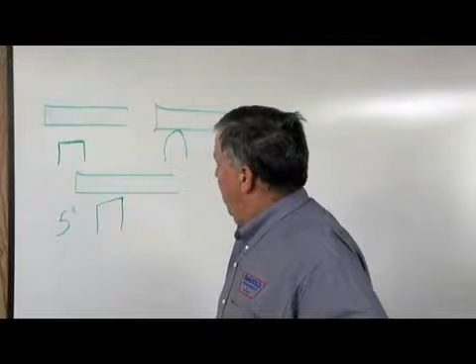Well, the design of the check assembly has to do with that area in relationship to how much spring load it takes to do it. The Cla-Val design, what they wanted to do was come up with a very, very small point right here. And that small point, as I say, is generated by that 5-degree taper of that seat. This is exaggerated. A 5-degree taper would kind of be just like that. It's almost imperceptible, actually. But anyway, the reason they have that 5-degree taper is because it had to do with the flatness of that disc.

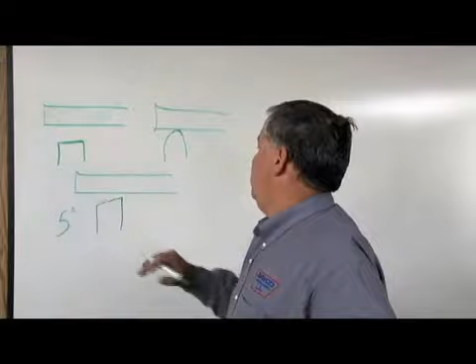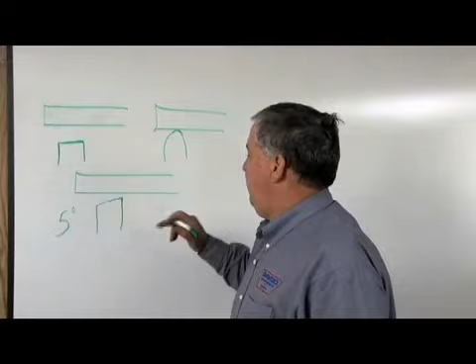Remember, it's a hinge or pivot style check. And like we talked about, the hinge or pivot style check has to have a perfect, where the disc hits the center of the seat, kind of like a golf swing. If it doesn't, it's off center, you have troubles with your differential loading. Well, Cla-Val has a relatively lower loading on the check valve. So by having this 5-degree taper, it was critical that this disc is perfectly flat as it first hits that seat right on the tip.

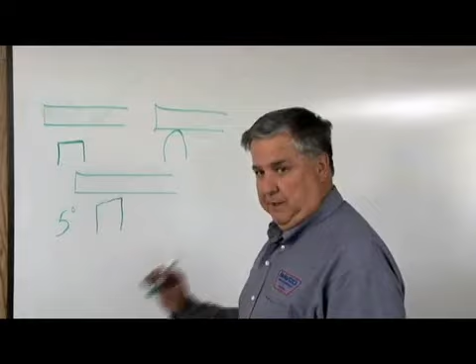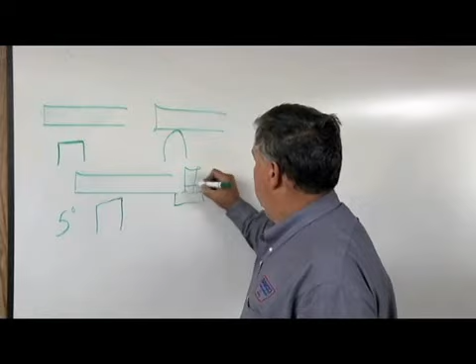And to hit that perfectly, it has to be within 5/1000ths of an inch. And that's why we have those spacer washers that we talk about to put the adjustments back in with 5/1000ths. Because what happens is, you know, it's got that bolt in the center here, and if we don't have the right amount of spacer washers when you punch that in, what happens is it bulges that disc out of the disc holder like this, right? And it bulges that disc.

So instead of this sitting right on the point, now you can see that that sealing surface is like this. So instead of sitting on one little point, now we're sitting on a relatively wider seat, and it's going to affect the way that our check loading holds. So that's why it's critical that we have that disc perfectly flat. We can't have a bulge into it, because if we have a bulge, we eliminate the advantage of the 5-degree taper by making it a rounded disc instead of a flat disc.

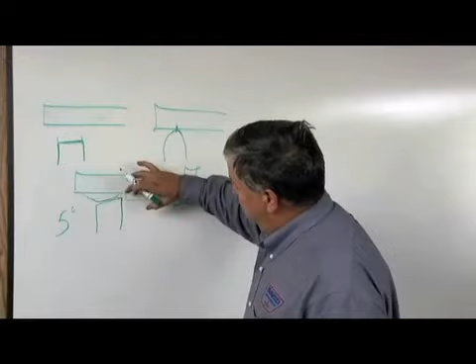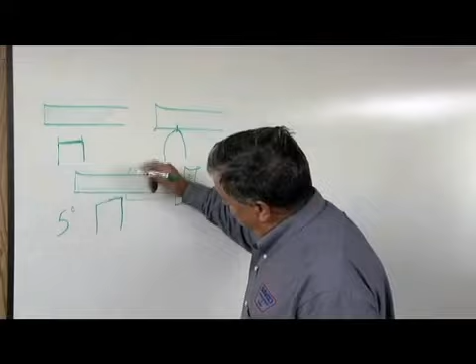Well, what happens if it's too thin? Again, if it's too thin, let's say the disc is up here instead of down, similar problem happens, because remember, this is a hinge or pivot style check. So if it goes to this point and doesn't hit that disc, it has to keep going a little bit farther, that much more distance. And as it goes down, now suddenly it's cocked. So that's why it's critical on the Cla-Val that it has to be literally within 5/1000ths of an inch, the flatness of that disc.

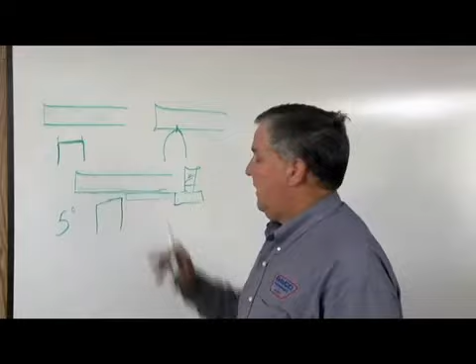If there's any kind of bulge like that, it negates the 5-degree taper. If it's too low inside here, same story. It's going to negate the 5-degree taper. So this is the 5-degree taper on the Cla-Val seat, and why it's so important to have that disc perfectly flat within 5/1000ths of an inch.

So to make sure the height of this disc with this disc holder on it is right, because you can see that if it was too thick and I pushed down with this bolt on top of here, it would squeeze that rubber out of the disc holder, and I would lose the advantage of that 5-degree taper. So how do I make sure I take up the tolerances between this plate and this plate? And that's basically what I'm trying to do with these 3 spacer washers.

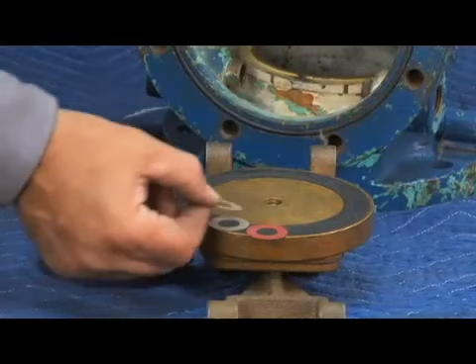These spacer washers, the gray ones are 5/1000ths of an inch thick, and the red ones are 15/1000ths of an inch thick. So with 3 of these, I can make up between 5 and 25/1000ths. In other words, there's 5. I put 2 together, there's 10. I take 1 red, it's 15. A red and a gray is 20. A red and 2 grays is 25/1000ths of an inch. So that's how I'm going to make up that 25/1000ths of an inch tolerance on this disc in relationship to this disc holder and disc retainer.

So how do I size that? Every time you rebuild these, you have to size these spacer washers. I've heard people say, oh yeah, you take them apart, you put the same color back as you took out. That's not true.

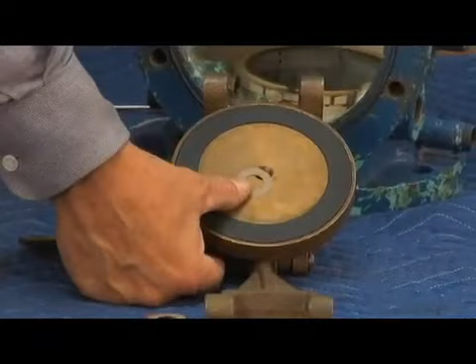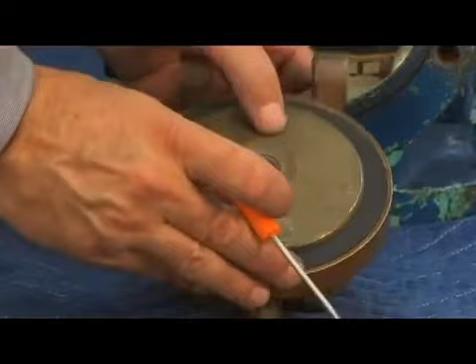Every time you take the disc out of the disc holder, you have to resize it, because that 25/1000ths is that close of a tolerance. So you start with the smallest, which is 5/1000ths, and you place it so that it's sitting across the bolt hole, just like that, okay? Covering up the bolt hole, I'm going to go ahead and put my disc holder on top and just hold it with my finger. And as I hold it with my finger, you can see where it's sticking right there in the middle of the bolt hole.

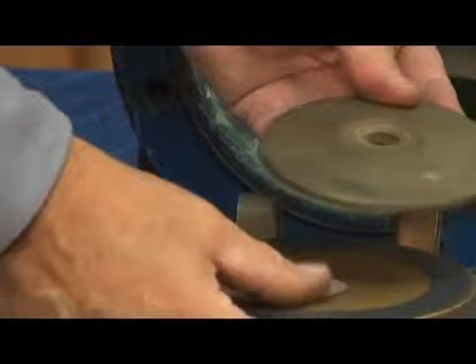So what I want to do now is see if it moves. It moved very easily, didn't it? So that means the tolerance between these two is more than 5/1000ths. So now I get 2 of them and go to 10/1000ths. Same story. Place it over the bolt hole. Place my disc retainer over there just like this. And it moves very easily again. So I haven't taken up the tolerances.

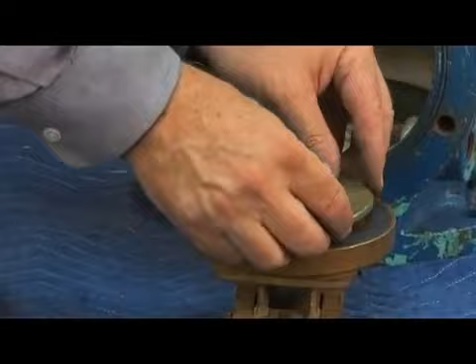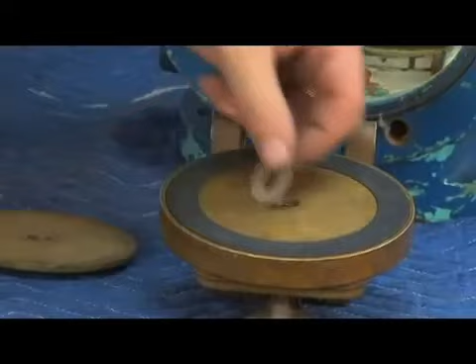Now I go to 15. With that across the bolt hole, now suddenly it doesn't move. In other words, just with the light pressure of my thumb, it's 15 thousandths. So that tells me that the tolerance between here is between 10 and 15. 10 is too little, 15 is too much. So we go down to 10. You go to the smaller of the two numbers. Because remember, we're going to tighten this bolt on there, and that's going to take up the tolerances between that 5 thousandths. So putting my O-ring back on, now I have it so this disc stays perfectly flat.

But it could be anywhere from 5 to 25 thousandths that you have to make up on that particular check design. The only one that's different is the 10-inch. The 10-inch disc retainer has a ring like this with 16 screws going around it like this. There is a washer on the back side of each screw that is one size. You don't have to size each one, but you do have to place that spacer washer on the back side of the 10-inch, which is slightly different.

But most of them, 2-inch through 8-inch, are going to be a single bolt like this with an O-ring under the bolt. Don't forget the O-ring under the bolt. Size your spacer washers accordingly, and putting it back together, making that perfectly flat will make your repair job a lot easier. Now, that's a 308-1, as I said. 308-4, Chevron disc. 308-1 new style is this style of disc. It's just a little bit wider.

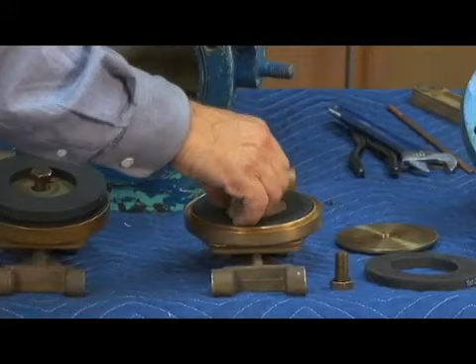What's different on the 308-4, and that's the one you see here on the right, as I mentioned, the difference in the 308-4 had to do with the disc and the disc retainer. If you'll notice, when I unscrew the bolt off the 308-4, we have that same O-ring. Disc retainer, we have our spacer washers. What did this one take? This one has 20 thousandths, but the disc is separate. Also notice that the disc holder is different. Notice that they put this area around the seat right here.

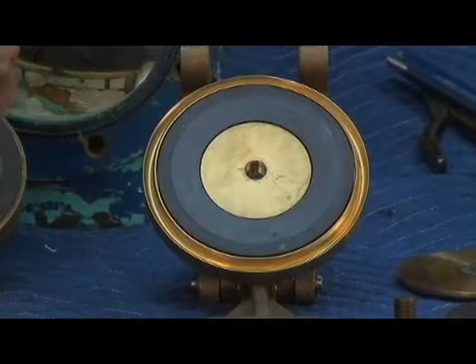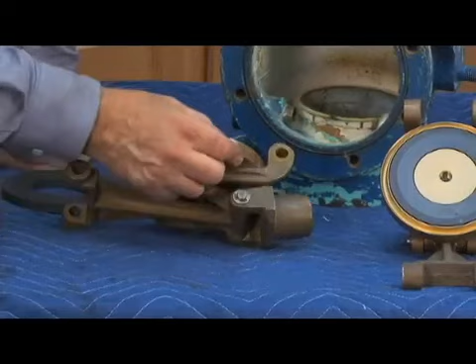One of the problems they had with the 308-1 style check assembly, especially in the 2.5 through 3 inch, is that the check assembly tended to have a rattling action. And I'll show you here. In other words, when this disc holder was here, it could bounce around like this. On the 4 through 10-inch size, there was enough mass in the disc holder that it really didn't have as much problem, but with the 2.5 and 3, it was more prevalent. And they actually had a small rubber bumper that was inserted in the back side.

Well, on the 308-4 style check, they put this extra gap around here. And what happened is when the check assembly opened, this kind of quieted down that clapper so that it didn't have that rattling action, which unfortunately could cause harmonic resonance issues. So the 308-4 style, the main difference is this valley around the outside of the disc holder. Still had the same tolerances we had to deal with on the 308-1, meaning the 25 thousandths or less. So you'd have the same spacer washer issues. But the disc holder did look different.

The check seats did not have this quiet zone. It was just a plain seat without that sleeve on the back side. So that's our 308-4. Here's our 308-1. Again, we're going to do the same basic alignment of those spacer washers, regardless which one we have. Okay. Now that we've got that back together, we tighten that bolt all the way down. We're ready to put it back together. So, let's get this in place. Put that like...

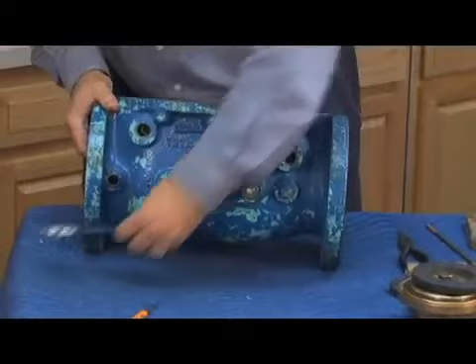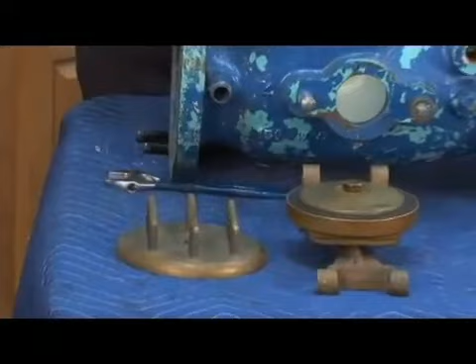So, our check assembly, again, this has a flat disc retainer like this. In the RP versions, some of the disc retainers looked like this, and they had these fins across the disc retainer. The majority were flat like this. You find it in the older versions that had the fins.

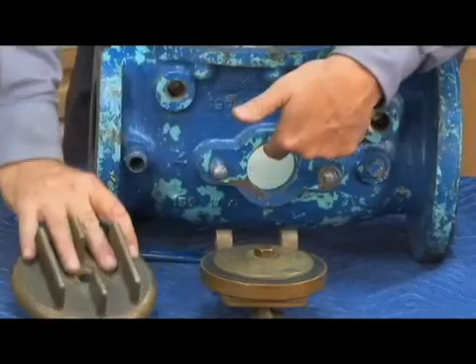The function of this fin design was that as the check assembly opened like this, it would turn up into the water passageway, and if you're looking through the water passageway, it would be called a straightening vane. In other words, as the water traveled across those vanes in this position, it straightened it as it traveled past this port right here. What's right here? Well, that's where our relief valve was mounted, right?

So this being off a 4-inch, as it opened up, it would open up right about here, and when it opened up in this position, it made it so that there was not a lot of turbulence as it went past that relief valve opening. Again, the older versions had this. Make sure if you do have this kind that you put it in straight up and down like this so that when it does open up, it creates that straightening action across the relief valve inlet.

Now, grabbing my clapper assembly, again, hanging on to both sides so we do not have it fall into the seat. I'm going to insert it in from here, catch my spindle, and push my spindle in from the side. Now, I've got to be very careful at this point because I have to pull up on my check assembly. In other words, right now it's sitting in there like this. Okay? As you can tell, it has to go like this so that it moves up and down.

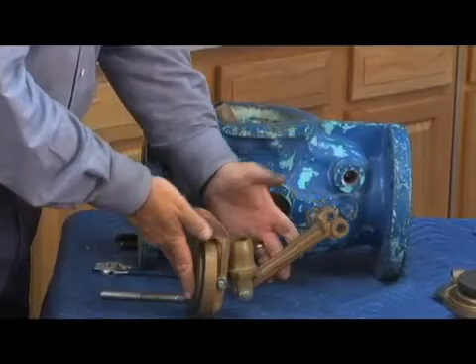It is possible to put the check mechanism in like this. And if the check mechanism has the yoke pointing down like this, now suddenly it cannot open. In other words, the yoke has to be up here so that as there's demand for water, this swings up into the water passageway. So it's critical that when I put this in like this, that I keep my hand on the knob, pulling up on it like this.

As I'm pulling up on it, now I grab this rear yoke, line it up with my holes, and go ahead and insert my spindle in just like that. After you've got it in, make sure that that disc holder moves up like that, because this is how it has to be inside the body. If it's like that, you'll get no water through the valve and then it'll never work.

Check spring, cover O-ring, check cover, get our bolts back in, O-ring seal on the check. Now, on the 8 and 10 inch, you want to be a little careful because as you can see, this is a 4 inch and there's not a whole lot of spring tension under that cover. But on the 8 and 10 inch, the spring can pop up about 2 or 3 inches and the bolts are only about 1 inch high.

So if you're concerned with the load on the first check of an RP on the 8 and 10, use a jacking screw, which is just a piece of all-thread rod that goes in here that's a little bit longer than the bolts. That way you can release the spring tension easily off the bigger, meaning 8 and 10 inch size assemblies. Now, I'm putting it back together. That's what it looks like.

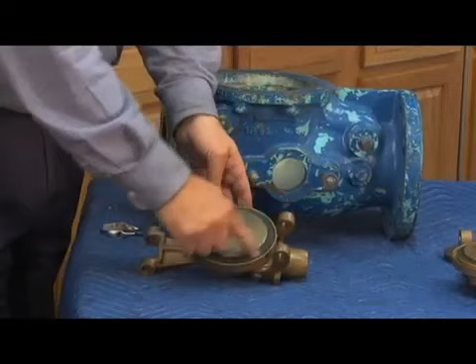In other words, back together like this with the spring tension on top, you'll see a small little imprint where the rubber disc was sitting on the seat. I want to look at that imprint and see where it is. It should be in the very center. If it's not in the very center, now we have to adjust our body bushings.

And what are our body bushings? These little brass bushings that the spindle is inserting into right there. How do we adjust those? Well, yes, we have to take the check assembly back out.

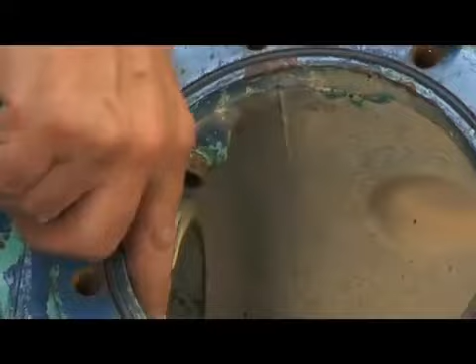The body bushings are designed so that if I have to move it one way or the other, in other words, if it's off to this side and I have to move it this way, that means I have to drive this bushing into the body. The cover bolts happen to fit right inside the bushing just like that. What that allows me to do is take a small driving rod and hit the head of that bolt.

I don't want to hit the front of that bushing because that's what it's going to slide on. So by putting the bolt from the cover in, now I have something to tap onto, and it's a very light tapping. Don't think you need a real heavy hammer to move these over a little bit, because all you're doing is moving it over no more than 1/16 of an inch, usually, if at all.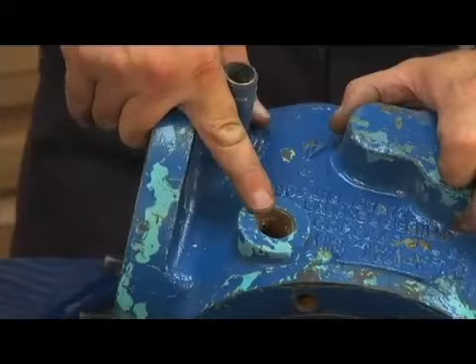And if you have to move it the other direction, where it has to go into the body, on the up to 4 inch, a 1/2 inch piece of hard copper tubing fits through here. And on the 6 through 10 inch, a 3/4 inch piece of copper will fit into the plug hole where the plug goes in. And that's if you have to move the bushing sideways.

But only check it after you put it back together, check it closely, make sure the alignment is square in the center of that disc holder. If it's not and you have to adjust the bushing, do it carefully. For the average repair, you do not have to adjust those bushings. You do have to do those spacer washers every time, but the body bushings are usually okay. But if you go to all that trouble and then find out that it's not centered, it's not going to work well. So let's get this back together again.

Check spring, cover, our body plugs. We're going to have 4 of them around the outside where the 2 spindles came out. And that's the toggle lever check design. Whether it was a 3081 check like this or a 3084 check like this, the different disc diameters, as we discussed, had to do with the serial number, a way of adjusting them.

The key thing is making sure we adjust within the 25 thousandths of that rubber thickness on the disc retainer. If we have the old style seat that has the sleeve, we have to make sure that it's clean so that the water will travel through those holes. In other words, where that sensing line comes through, making sure the water has adequate volume to work the relief valve. If you've got the old style thin disc retainer, make sure that's in there properly. And that's the 3081, 3084, sizes 2 through 10 inch.

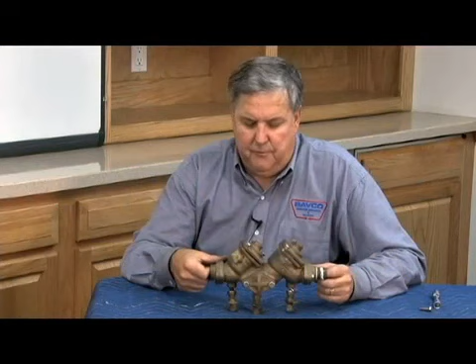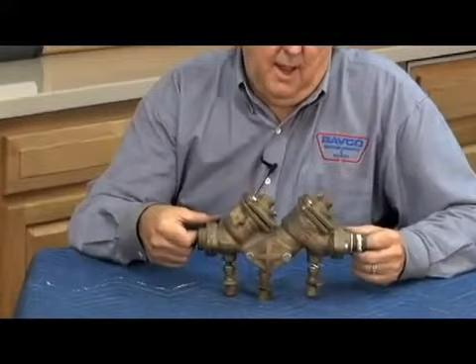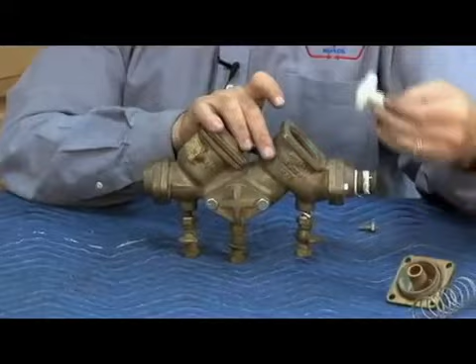Cover came off, O-ring seal, check spring, check disc holder, check seat threaded into the body, and it could be replaced if the check seat was bad. Average repair wouldn't need it. There were 2 different designs of disc holders in this over the years. As I mentioned earlier, there's either a stainless steel version, which is the older one, or the Delrin plastic version. Whichever one you had looked like this, the oldest version being the stainless.

They had some corrosion concerns where these did corrode, and they replaced it with a plastic, a neutral material that didn't corrode. But if you have the old stainless steel type, it was 1 nut holding the disc into the disc holder; go ahead and change the disc. Again, the same basic construction with the O-ring on the stem. The check disc holder slid into the cover like this. That's how it was guided through its travel. It had that octagon shape here, you see, like this.

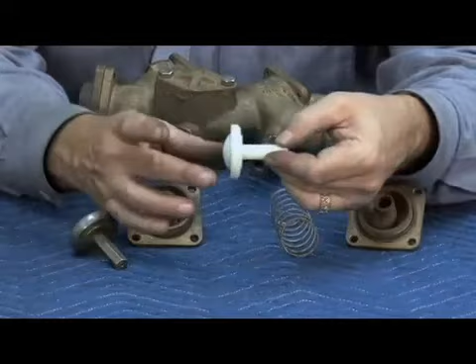The plastic one, which was made out of a plastic called Delrin, looks like a one-piece design because there's no screw to take it apart. You actually held the disc holder and the stem and twisted the two. In other words, the disc holder had the female threads and the male threads were on the stem. There was an Allen head slot right there, so once you got it together hand tight, you get your Allen head wrench to tighten that back up.

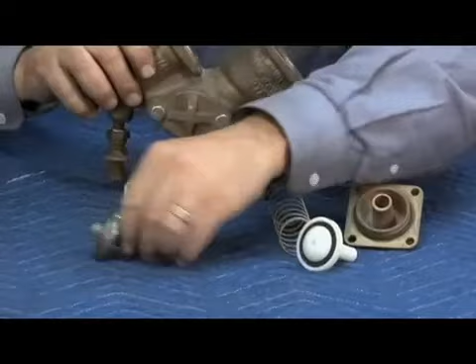Reassembly is going to be just the reverse. Again, if you had the stainless steel version, the rubber kit would fit either stainless or, yes, I know I'm not putting a spring back in there, would fit either one. The rubber parts would fit both designs. Plastic was the more common one, produced over the years.

Check spring next. Make sure when you put the covers back on, you have the air screws pointing up, not like this, because if the air screws are not pointing up, you're not getting the air out of that assembly. See how this one is on the top where I'm bleeding air out? I can put the cover to the side like I did on this one, but if I do, I'm not going to be able to bleed the air out of that particular check body. So make sure the air screws are pointing up like that.

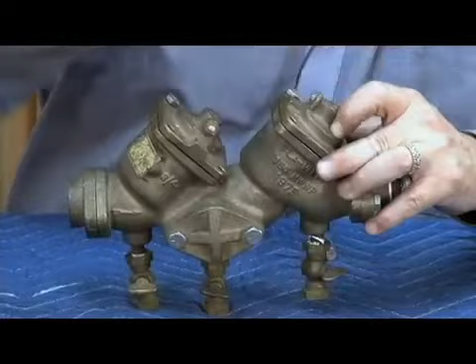And that's the poppet style check valve from Cla-Val. It could be the poppet made out of plastic, the Delrin, or it could be the stainless steel design as we saw. This appeared in the model D2 double check or the model RP2 reduced pressure assembly. Now we'll discuss the relief valve used on the Cla-Val. We've discussed the 3081 and 384 check assembly and the poppet style check assemblies, and those were the different checks. These are the 3 different relief valves you would have mounted on one of those assemblies.

The oldest version, this one, is called the CDHS 14. The 1-inch size was used on 2 through 2.5, the 1.25 was used on 3-inch, and the 2-inch CDHS 14 was used on the 4 through 10. Looked like this. The CDHS 20 was used on the RP1, RP1EX series over here. Again, the 1.25 one was used on the 2 through 3, and the 2-inch used on 4 through 10.

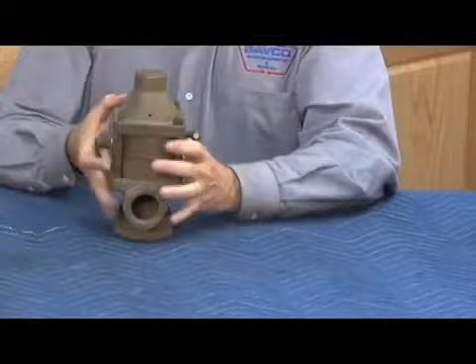And the CDHS 24, which uses the same designations as the CDHS 20. So there's 2 basic designs, the CDHS 14 and then the 20. And the 24 is a variation of the 20, which I'll show when we take those apart. So let's do the oldest one first, the CDHS 14. Rubber repair parts are of limited availability on this. They're making them on the sizes 4 through 10 inch only, I believe, which is the 2-inch CDHS 14. This being a 1-inch version, which fits on the 2 and 2.5 inch.

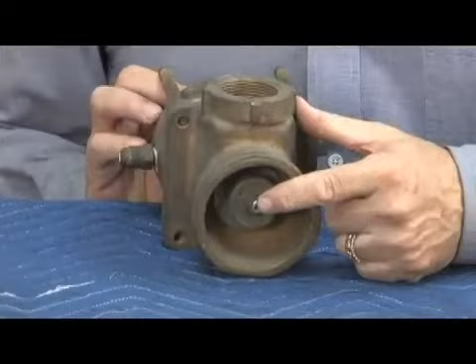There are 4 bolts on the top. To rebuild it, we have to unscrew the relief valve from the check body. 2 external relief valve sensing lines. Remove the 4 nuts off the top. There will be a slight spring tension from the relief valve underneath. Remove the relief valve spring. You'll expose a stem with a wrench flat and a nut. There's also another wrench flat and a nut on the bottom. You need 2 wrenches. Hold the bottom as you unscrew the top nut.

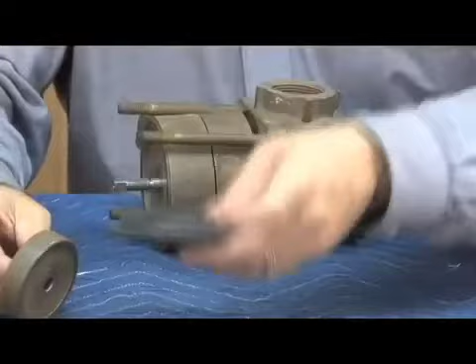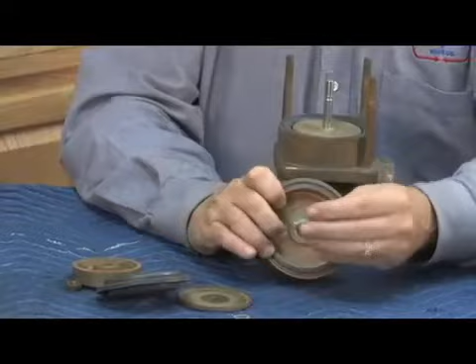Once you take the top nut off, the upper bellofram and bellofram retainer come out next. Next is the bellofram support. Then there's a small stem O-ring. Next comes the upper bellofram body, which comes off here. Spacer washer. In the middle there's a small little bushing that sits there with 2 O-rings in the center. Next, the little friction washer here. Then we have our bellofram plate.

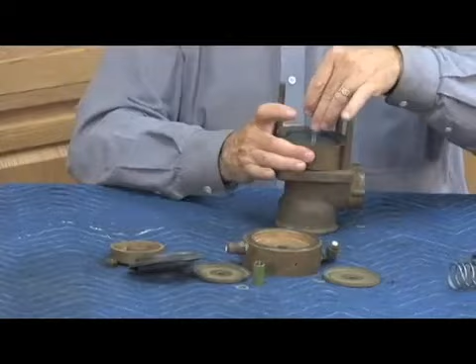Lower bellofram. Bellofram support. Lower body. Lower bellofram. Lower bellofram holder. Stems come out from the bottom with relief valve disc. So those are the parts of the CDHS-14. Disassemble the relief valve stem. You have 1 nut on the bottom. Then comes our disc and disc holder and stem O-ring right here. Reassembly is going to be reversed with our stem O-ring, our relief valve disc. This nut has to be tightened on here very tight.

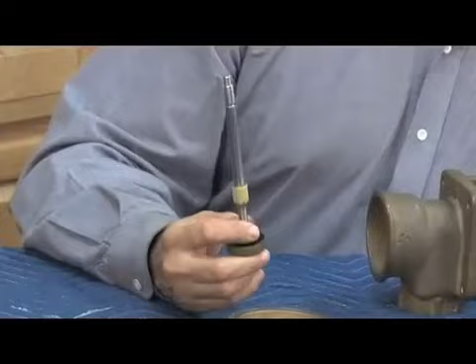Now, inspection of this relief valve stem is important on the CDHS-14 series. Here's the 1-inch stem, and here's a corresponding 2-inch stem. As you can see, they look identical. The key thing is this white Delrin bushing here. This Delrin bushing slides up and down through the center of that relief valve body, and it's very important for the relief valve opening point that that's on there properly. So what you want to do is grab it, make sure it's not loose. It's a shrink fit on the stem, and make sure that it's perfectly smooth. It should not have any scars or markings in it.

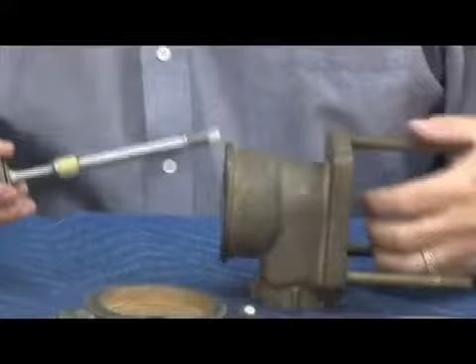Now, to reassemble, we have to put the stem in first. The relief valve seat stays under the bottom and is not removed for the average repair. But in order to assemble this properly, we have to assemble everything along this stem. And if I let go of the stem, you'll see that it falls down, and it's not going to be easy to repair. A small piece of paper or rag will hold the stem up just like this for our assembly process. And I removed a bolt so you can see how it goes. Okay, so first thing is our lower bellofram retainer. Our lower bellofram, which goes on here, which sits in the middle through here. So, like that.

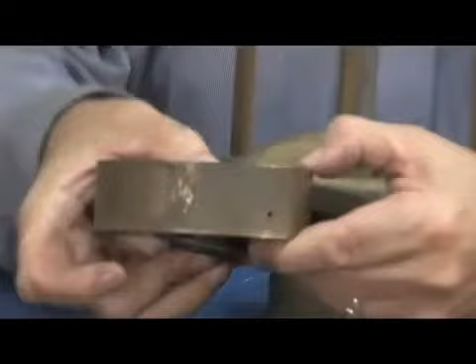This, we're going to go ahead and line it up. Now, there are breather holes on both sides of the bodies. Because there's 3 rolling belloframs in here, one side's open to air and one side's open to water. You've got to make sure that those air-breathing holes are open, like we've seen in many different assemblies so far. And here's another one where we have to make sure everything's working just right.

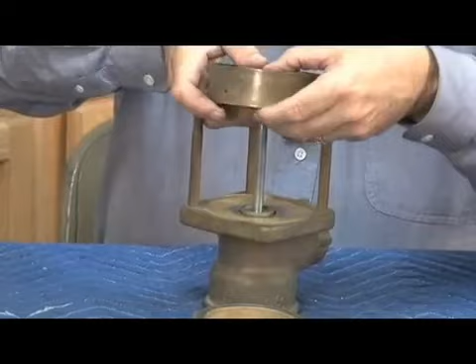So, let's go put that on first. Put this on next. And now, take this, and just, there, and that should move in there like that, okay. Next is our lower large bellofram, our plate, our friction washer. We're going to replace the 2 O-rings in our body, place our spacer in the middle.

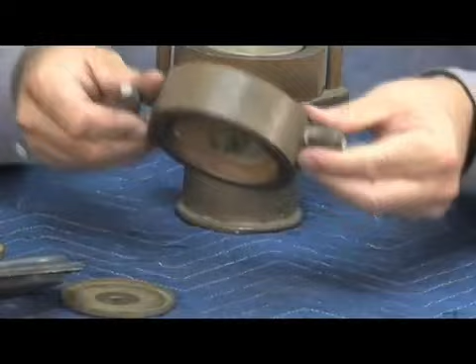This is also a very important part of the relief valve opening point. This has to move easily through here. That green, which is like powder coating they put on there so that it will move easily, goes along with that Delrin bushing, which is sitting in the middle of that stem. Now you'll notice that there are 2 connectors. Make sure the upper connector is on the top, pointing towards our inlet side.

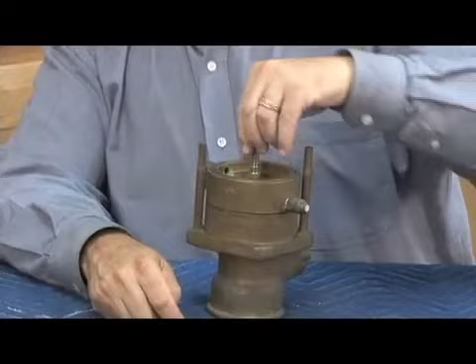At this point, our second friction washer on the other side of the bushing. Our lower diaphragm plate, our small stem O-ring right there. Now we're going to put our upper bellofram retainer. Go ahead and tighten that nut back on.

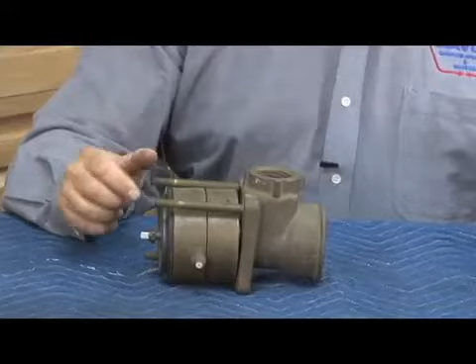Now, whenever we have a bunch of belloframs, we know we don't want to twist them. We've talked about that several times today, so we're going to get 2 wrenches, one on this side and one on that side, and tighten that very tightly along that stem. Very important that we have them tight through the whole area. We don't have the advantage of an O-ring in that seal, but we have 3 belloframs that we have to make sure are in there tightly. So, once that's done, cover and relief valve stem.

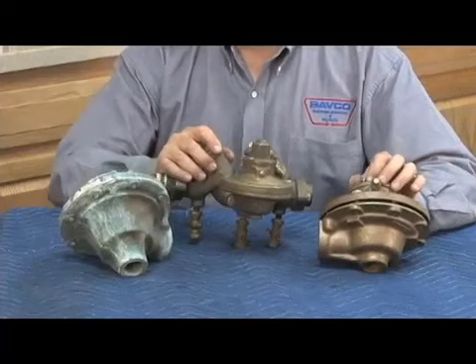And that's the CDHS-14, which was used on the model RP, the original version of the Cla-Val relief valves. Now we'll talk about the CDHS-20 and the 24 relief valve. Here in my hand, I've got a 3/4 RP2. Here's the CDHS-20 relief valve in the 3/4 inch size. Here's the 1.25 inch CDHS-20, which went on the backflow assemblies sizes 2 through 3 inch. And they had a 2 inch CDHS-20 that went on the backflow assemblies 4 through 10.

CDHS-24 was produced, which was a revision of the CDHS-20. The bodies look dramatically different, don't they? The 20 is rather short and the 24 is rather long. But other than the bottom of this body, and I'll show you what's different inside with that depth of the seat and why they had to change it, they have the exact same rubber repair parts inside. So let's go ahead and take the CDHS-20 apart for now. Here we're taking apart the 1.25 inch, which fits on sizes 2 through 3 inch.

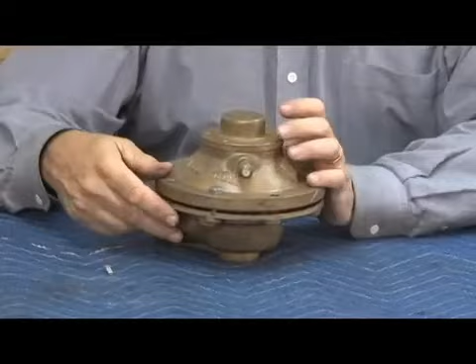On the top, we're going to have some screws that hold on this upper portion. And on this upper portion, you'll notice there is a breather hole. Where is it? There it is. That small little breather hole is very important for the workings of this assembly. Anytime we see a breather hole like that in a cover, we know that this relief valve breathes, meaning that the air moves in and out. This is not a water port, but an air port to let air in and out of there as a rolling diaphragm moves up and down.

And as I've just said, when you take the cover off, you'll see a small inner rolling diaphragm. The rolling diaphragm on this particular assembly causes a lot of problems on repair. We'll talk about that when we put it back together. One nut on the top. Our upper bellophram bushing. We have a small relief valve stem O-ring. Our upper bellophram plate. Once we have those parts off, now we'll remove the relief valve upper body bolts.

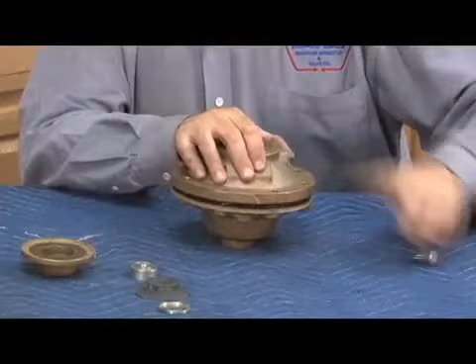Under the bolts there will be spring tension from the relief valve spring underneath. As the bolts come off, the relief valve upper body comes off first. You'll notice that there is a Delrin sleeve in the center. This is very important because it slides up and down along this stem. You have to make sure that it's perfectly smooth inside there.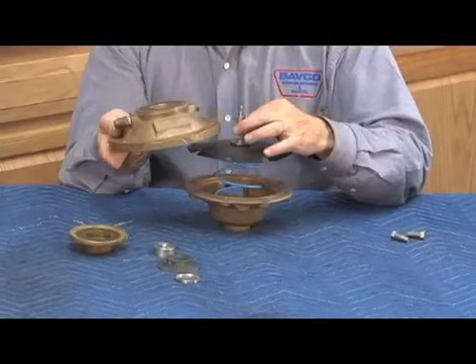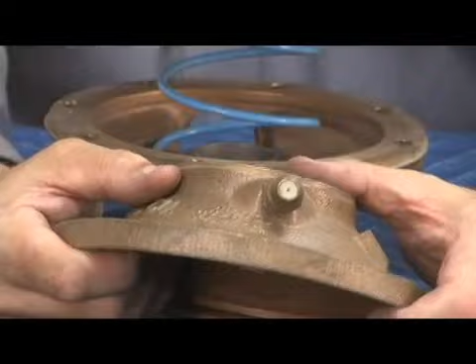Doesn't have to be repaired for the average repair, but just inspect it to make sure it's perfectly smooth. Most of the CDHS-14 and 20s, the fitting that attaches to the relief valve body, you'll notice in the center there's a piece of plastic which is an orifice fitting. In other words, it looks like a standard 3/8 by 1/8 inch flare fitting adapter on there, and they break off unfortunately regularly because they're very small, that 1/8 inch pipe thread.

But a lot of times they get replaced with an average fitting and they don't notice that there's that small piece of plastic in there. That's an orifice fitting, very important for the working of that relief valve. It has to do with the amount of volume of water on and off the top of the relief valve diaphragm to make sure it opens smoothly. So make sure you know it's there and don't arbitrarily just put a fitting on if it breaks off.

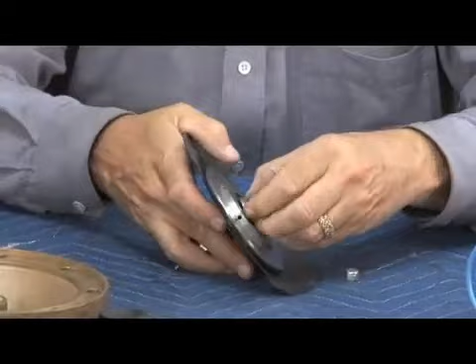Relief valve stem is next with our relief valve disc, relief valve spring, and in the lower relief valve body is our relief valve seat, which does not have to be replaced for the average repair but unscrews out of the top if it has to be replaced, just like this, sealed by an O-ring underneath. The relief valve stem has one nut that holds the disc retainer into the disc holder, relief valve diaphragm, stem O-ring, lower diaphragm plate, and our relief valve stem.

Now, the relief valve disc is encapsulated within this disc holder, and the edge of the disc comes all the way back to here. I'll stick my screwdriver in it so you can see how far down it goes. It goes down that far. So it's way back inside. You have to dig the disc out of the disc holder, and especially with the older ones, because it's a relatively hard disc, it can be hard.

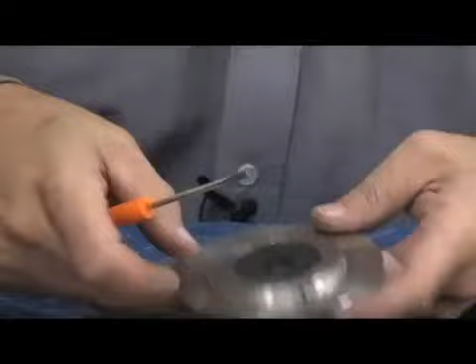They've got a small hole here on the side which allows you to take a piece of wire to push the disc out if you're changing the disc and you can't dig it out through the top. But just as important, when you go to put it back in, it's very important that that disc sits all the way into the lip and is pushed all the way back into the disc holder.

Okay, reassembly is going to be the reverse. We start with our stem, lower diaphragm plate, stem O-ring, our diaphragm, RV disc and disc holder, disc retainer, and our lock nut. Making sure that's very tight. Yes, there's an O-ring seal in the middle, but we want to make sure that we have that properly loaded on the O-ring. Relief valve seat.

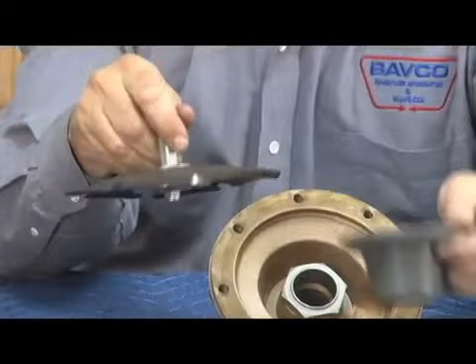Now, this is the CDHS-20, as I said, and the rubber parts between this and the CDHS-24 are very similar. What's different on the 20 and the 24 is this disc holder here. This is the CDHS-20 disc holder, and this is the CDHS-24 disc holder. Notice where the relief valve seat is, very, very high. This is attached to the check body on the side.

So if that relief valve disc closes up and down like this, water coming in here would go through this seat to discharge. But you'll notice that that seat is that far above the bottom of that body. And if this was attached to the side of that body like it was on the RP1 series, remember on the RP1EX they put it underneath the body, theoretically this much water could stay in the body and it could not go out of the relief valve seat because it's at the highest point.

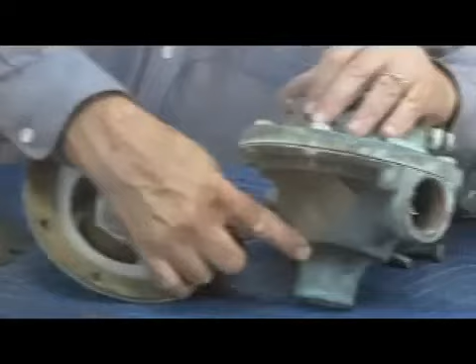So what they did on the CDHS-24 is they lowered the relief valve seat all the way down to here. Now the relief valve seat is at the bottom of this throat. So what does that mean to the relief valve disc holder? This. So the CDHS-20 is stainless steel and it's flat. The CDHS-24 is a plastic, but it's much deeper so that it goes all the way to the very bottom of this body. That's the main difference between the 20 and the 24.

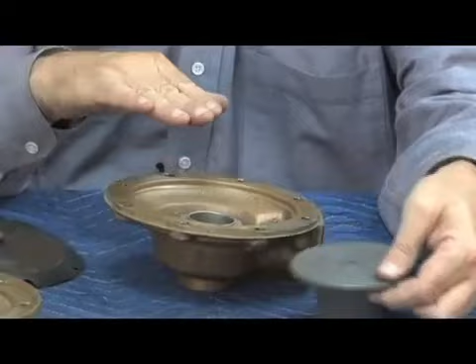The 20 had the relief valve disc attached right to the diaphragm and the relief valve seat was up higher. The 24, they cut this out and removed it and put the relief valve seat on the very bottom, and that's why they had the longer throat on the disc holder. Main difference between the 20 and 24 are those two pieces right there. So let's go ahead and put the 20 back together.

Relief valve spring, our relief valve stem. Going to line up our relief valve diaphragm into our bushing. Now, remember that this is attached to the side of that check body like that. So we have to make sure that our sensing line is attached to the right place to catch our relief valve sensing line. Doesn't do any good to rotate it over here and then we can't hook up our sensing line. So make sure we have it attached for our sensing line.

Go ahead and get our cover bolts in. And it's always better to put your bolts all the way in around before you compress that spring, because as you compress that spring it can pull the diaphragm down. Catch the relief valve body bolts like that.

Alright, now, that relief valve stem moves up and down, as I say, with our diaphragm trapped through here. And I mentioned that this upper diaphragm is a guide. Well, that's because there is water in this upper portion. You can see the stem here. Our high pressure sensing line puts water on the top side of that diaphragm. The low pressure sensing line comes through internal through the body through here. But this upper portion acts as a guide, as I mentioned.

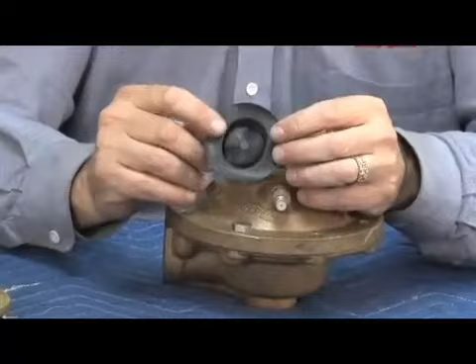You'll notice up close that there is a relatively shiny side and a relatively dull side. That's because this relief valve rolling diaphragm is directional. It only goes one way. The side of it is perfectly flat, so we don't have a bevel to look at like we do on most other designs to determine which way it goes. And if you think about it, the shiny side is watertight because it's got an extra layer of rubber across it. Where the back side that's dull, you can actually see the fabric inside that rolling diaphragm, so you know that that cannot hold water.

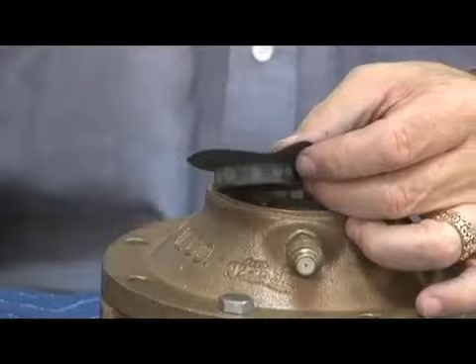If you put this in upside down, meaning the shiny side pointing up, water comes from here and will actually push its way through. And what will happen is after a day or two, you'll see these little pimples develop and water will start shooting out this little breather hole right there. Because what happens is it rubs back and forth on that fabric and ruptures itself.

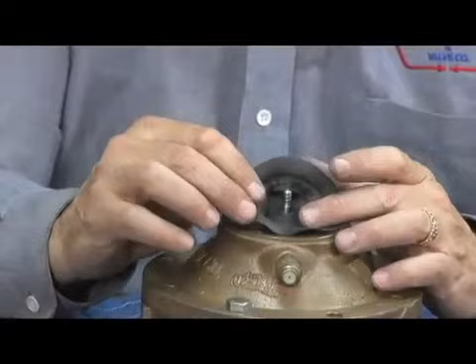The smooth side needs to be facing down. Remember, water's coming from this high pressure sensing line and coming up. The top port is open to air, so you don't need the water seal on the top. Bottom is where you need the water, down there. That's where the shiny side goes down against the water as it comes up. Okay, let's go ahead and reassemble it.

Get our relief valve diaphragm retainer, our upper stem O-ring, our diaphragm with the shiny side facing the water, the dull side facing up, stem nut. Go ahead and get that tight with a proper wrench. Now we can roll our rolling diaphragm down.

Now at this point we want to stroke the stem, make sure it moves easily through its travel. If it doesn't move easily, we're going to redo it and check it again, but it should move very easily. You can pull up on the diaphragm like that to make sure it moves easily up and down. Rolling in place. Remember our little breather hole right here? Always point the breather hole towards the back.

Now you want to be careful when you put this cover on. You don't just want to shove it on like that, because if you do, you have a good chance of smashing that rolling diaphragm. So put it on the top with two fingers, working it back to make sure you don't affect the roll, and have the breather hole pointing out this way. That way we have a visual indicator away from the check valves if you start leaking water out of there.

And what may happen again is if you don't put that shiny side towards the water, and you put the dull side there, you're going to have the problem of the water shooting out of that cover. So remember, dull side to air, shiny side to the water.

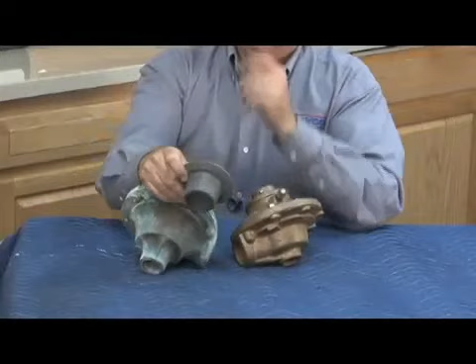And that's our CDHS-20. Here's our CDHS-24. The only difference being the location of the relief valve disc holder. On the 24, it was longer so that the seat could be on the very bottom, and in that way the whole relief valve body could drain, as opposed to the CDHS-20 where the seat was up here, and unfortunately the whole half of the body of the check and the relief valve could sit in water if there was a backflow condition. And that's our relief valves for the Clayton valve models.